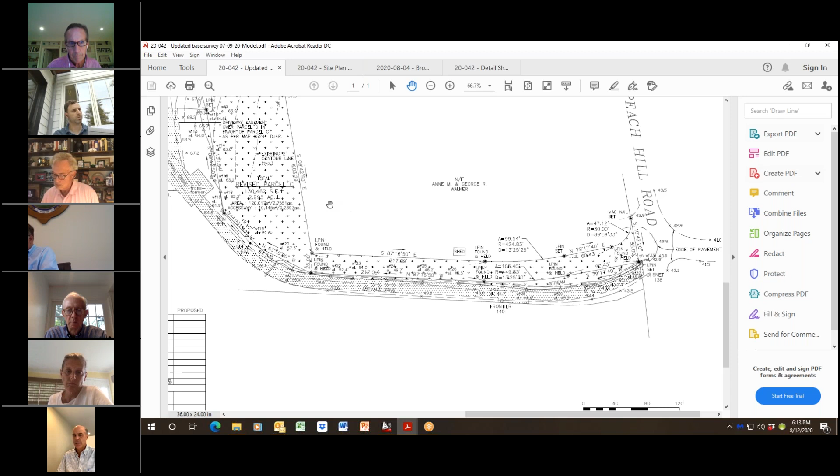Doug DiVesta, professional engineer, representing the applicant. What we have for you tonight is 26 Peach Hill Road. It's for a knockdown rebuild of a house. What we're looking at right now is a parcel that's around almost 3 acres. It's a rear lot. So I'm showing right now on the screen the subdivision survey map. Here's Peach Hill Road. There's a common driveway that I'm following with my cursor on up.

There's wetlands all along the north side of the existing driveway. It's coming up to the main body of the property. The house to the south of us was redone in 2006, so you might have seen at that point that parcel. The existing house is located in the easterly portion of the property. Property slopes from west to east, wetlands all along the easterly boundary.

What the proposal is, what we're doing is we're going to raze the existing house, construct a new house that's further to the west with an attached garage through a portico, with 2 driveways coming off of the existing driveway to service a courtyard in front of the house, another courtyard serving the garages.

With that, they're going to be putting a pool further to the west with some terraces. The existing house is currently on a septic system, which will be abandoned. A force main with a grinder pump will be connected to the sanitary sewer line, which has been brought up from Peach Hill Road.

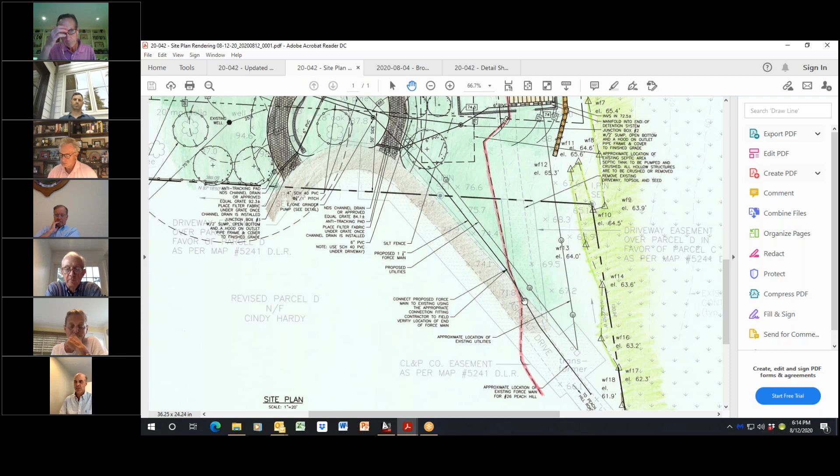The red line that you're seeing here is the upland review area. So the majority of the property is outside the upland review area.

We are putting a detention system in down underneath the proposed playing field. Right now that area is a driveway, so that will all be removed, grassed, and then a detention system will be installed there.

Erosion control will consist of silt fence, a double row silt fence with hay bales at the down gradient property line, or not property line, but just west of the

wetlands area. Also on the call today is Bruce Eckerson, the landscape architect. I'll have him go over a little more about the planting plan, the mitigation area of the wetlands in terms of removing invasive species.

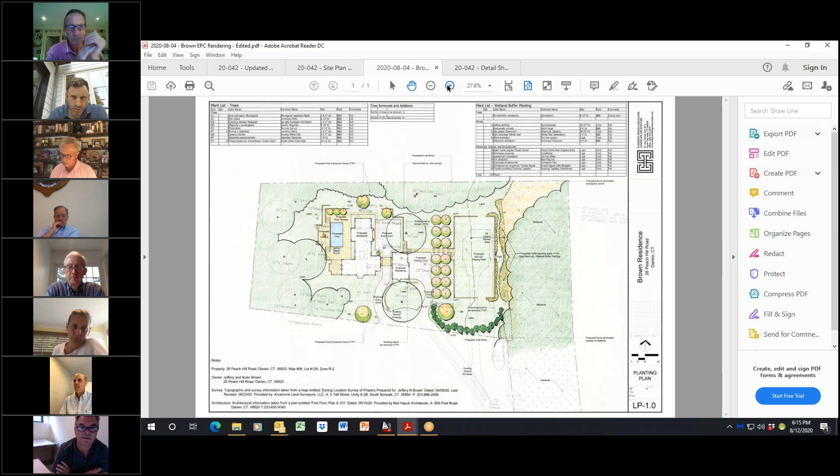So Bruce, you want to discuss your landscape plan? I'd be happy to, Doug. Thank you. Bruce Eckerson, Principal, Eckerson Design Associates, presenting tonight on behalf of the owners. We've developed a landscape plan to accompany the house and the drainage improvements.

Within the upland review area, we are going to be doing some regrading to create a level play field. On the easterly side of that play field is a retaining wall, east of the existing driveway, which will be removed, as Doug said.

Between that wall and the edge of the wetland, we are proposing to remove a line of mature burning bush and replant the area between the wetland line and the retaining wall for the playfield with a combination of native trees, shrubs, perennials, ferns, etc., to improve that edge and buffer the development uphill.

As part of the overall site development, there are several trees to be removed, all of which are outside the upland review area. I believe we are proposing 11 trees to be removed, and we are now showing 44 new trees to be planted.

We are proposing to do a little bit of evergreen screening along the southern edge of the property. Part of that screening does go into the 50-foot upland review area.

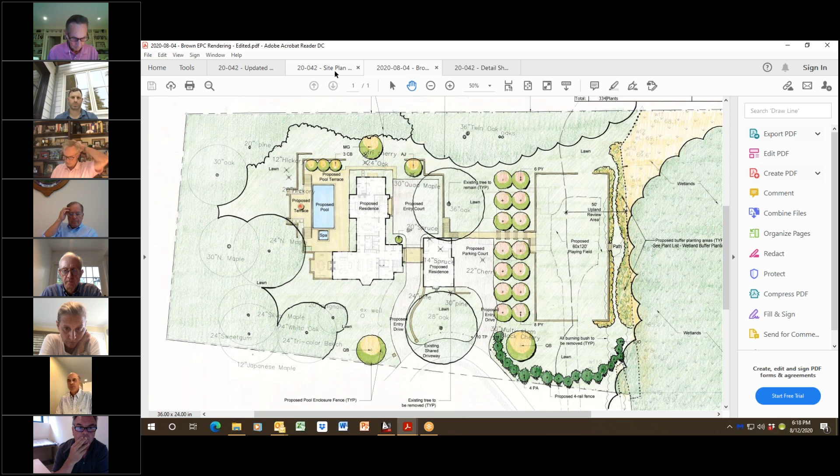Thank you, Bruce. So that's really the summary of the proposal. As we talked earlier, this will be going to planning and zoning for a grading and filling permit, so they will have a public hearing on the application. So is there any questions from the commission?

Going down my list here, Jim Millard? No, very good overview, no questions, Eric. Thank you.

Gunnar? One question, on the diagram, what is just to the west of the playing field? It looks like little circles. Yeah, right, these are additional trees, decorative trees. Bruce, what type of trees are those? That's intended to be a grove of cherry trees, ornamental cherry trees on the slope. Okay, that was my only question. I just think that looks good.

Okay, Michael Irvin? Can you hear me, guys? We can. Oh, great, okay. Hey, Doug, couple questions. Sure.

So to the east of the demarcated wetland boundary, the upland review area boundary, where you show the storm, are those galleys, proposed galleys? Yes, they are, they're Cultec units, they're called C4s.

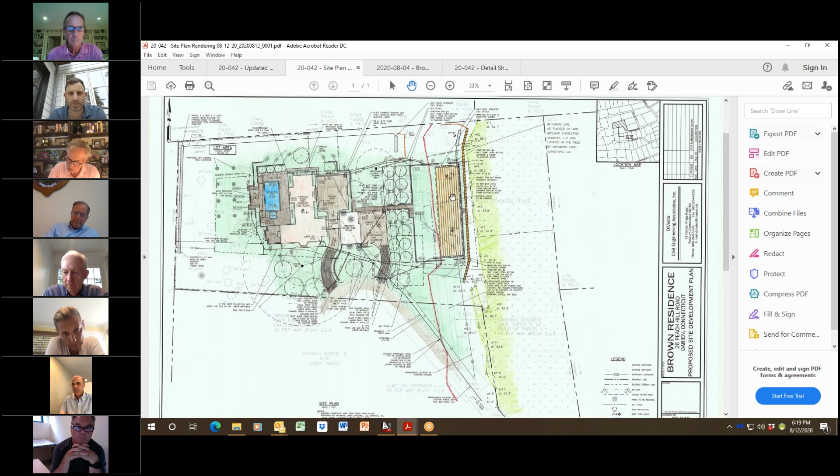I'm sorry, is that area actual wetland? No, it's not. The wetlands are this, let me blow this up a little bit for you. The wetlands line is right here where this green line is, with those triangles. That's the wetlands boundary from there to the east, to the easterly property line.

And you have tests, so I can see that you have 2 perk test holes, 2 deep test holes and 2 perk tests on each end of the drainage system. And how did those work? Let me show you, what do we got here?

The question is you're putting stormwater retention adjacent to a wetland. Are those going to perform? I mean, obviously, yes they are. You say they're going to perform. We got 11, the water's a little slower, one hole's a little slower there.

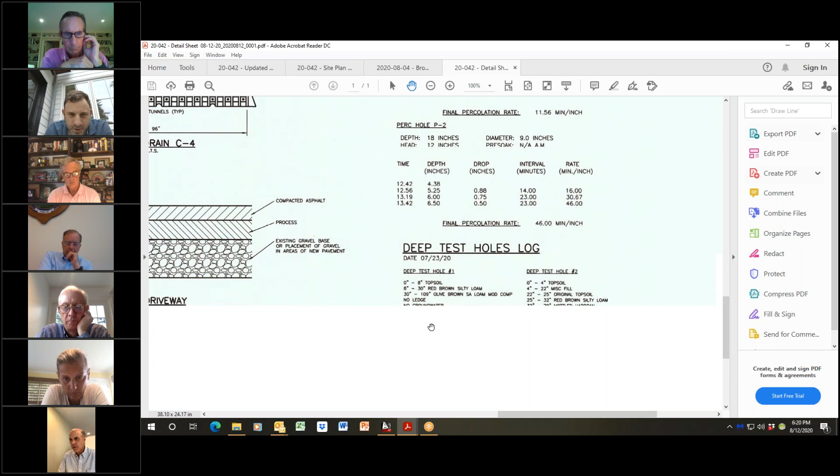Groundwater level mottling at 36, mottling at 33. Groundwater is at 65, and the drainage system is fairly shallow. I put the drainage system fairly shallow there. That's why I used a smaller height drainage system.

So we actually raised this up a little bit. We were actually a little lower, raised the whole area up, because this lower portion here is going to be filled up. So we're raising the system up, so we are above the groundwater level. As it is, groundwater is 65 inches below grade, but you're going to fill on top of that to install the Cultec, to give the Cultecs increased area to infiltrate.

And those Cultecs, what are they, like 24 inches deep? No, only 8 inches deep. Oh, they're only 8 inches deep. That's why we're using them.

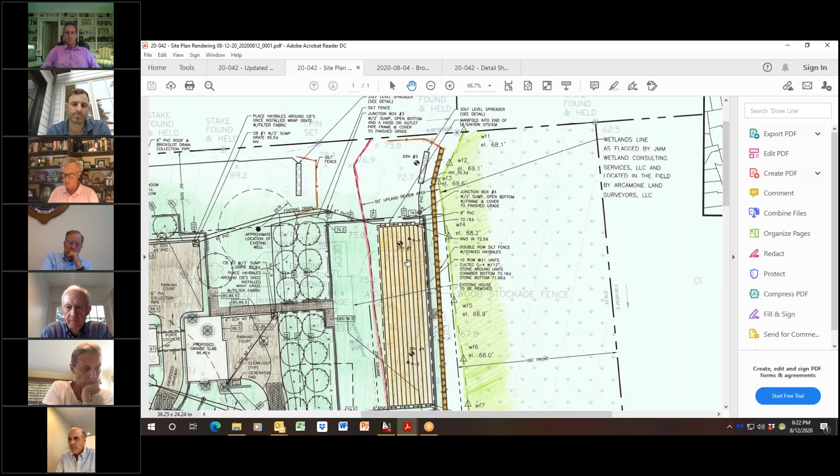And how much are you, what's the total amount, because you're going to planning and zoning for filling and grading, how much total cubic yardage are you increasing or filling? How much are you filling? We're filling it approximately, this corner here is at 74. Existing grade is around, I think it's around 70.

I can see the numbers here. It's like around 3 feet of fill brought in that area. And what would the total yardage be, cubic yardage be? I don't know off the top of my head, I'd have to do the calculations for you. How about ballpark, dump trucks? Again, I have to do some numbers to tell you for sure.

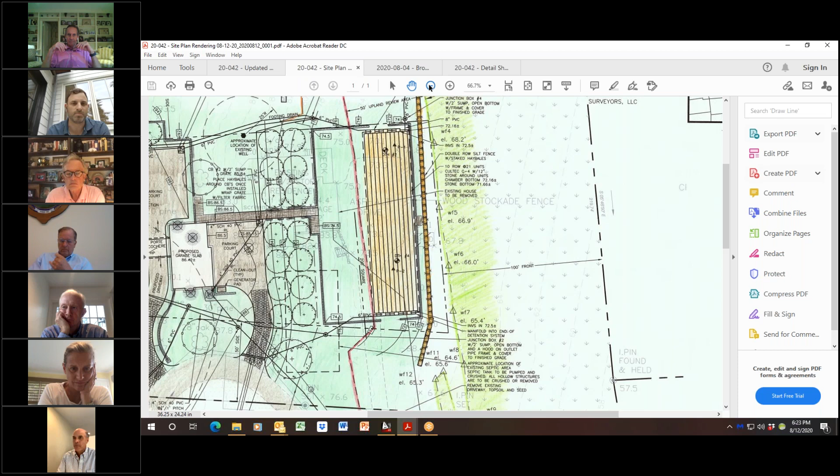So to quote my chairman, I hate to be the mosquito that always makes the first bite here. I guess my question is, as a commission and wetlands, I find a trend where we have these large developments. Our mission is to protect the impact to the wetlands. And all of the mechanical drainage operations are finding themselves in the upland review area. Is there a more prudent and feasible location and place to put this stuff? Or is everybody comfortable with this method? That's my only comment.

Well, the drainage, this whole property drains from west to east. So it all drains in one direction. So we're not changing the flow of water, it's still flowing in the same direction there. Is there a place to put the drainage system in another location? There might be, but everything is draining in one direction. So we collected all the water and brought it to one area, and then we're allowing it to go through into a wetlands area from there.

We felt this was the most feasible area, because this site is also not served by town water, it's served by private or individual wells. So we have a well on this side and a well on this side here. We've got to maintain a certain distance from that for the health code. So there's limited areas where we can put a drainage system out here. We felt that by taking away an impervious area of the driveway, and making that a lawn area, play area, and putting drainage underneath, that was the ideal spot, because it's a fairly level area being created, and that was probably the best use of that land for us.

No, I understand that. I have no other questions. Okay, Kelly? No questions. All right, I have no questions as well.

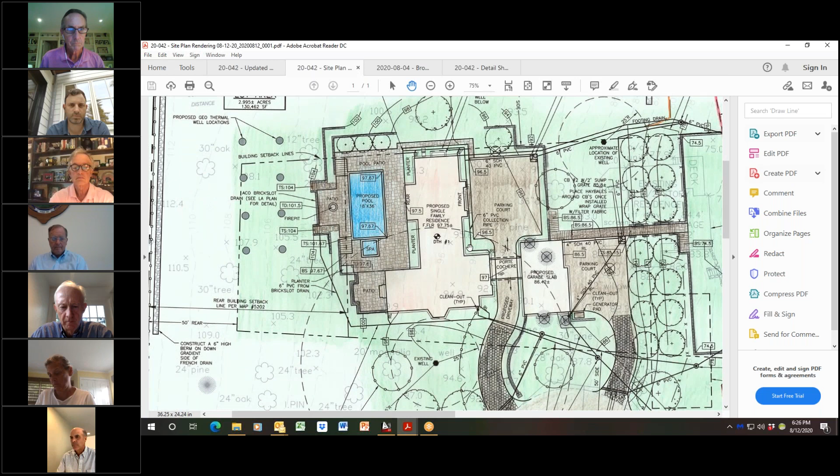Bruce, do you know how much raising the house up out of the ground there? Bruce? Yeah, sorry, can you zoom in just a little bit? So, 97, 93, so 95, 6. So we're basically through the middle of the house, Doug. You see the 96 contour at deep test hole 1. Yep, so the finished floor of the house is 97.75. So it's kind of a balanced cut and fill. So if you go down 9 feet, basically the basement's going to be at the garage slab at 86.42. Right.

So we'll be in the groundwater, Eric, but we're also putting a curtain drain up along the westerly property line that will collect discharge from the neighboring property that drains onto this property. So we're intersecting some of the groundwater up here, bringing it down to a level spread and allowing that to sheet flow down along the westerly, northerly property line there.

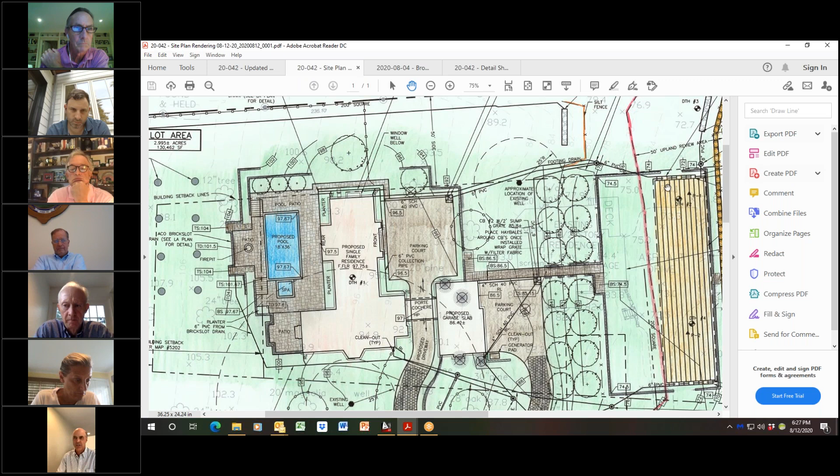The footing drains will again have a sump pump. For emergencies, they'll have a sump pump, but it's not going to be going 24/7. This one won't have a sump pump. It'll be gravity fed because of the elevation difference in the property, draining down into our detention system area here. So we've got that being collected there. Correct.

Okay, Rich, what should we do? Because I don't think we need a public hearing on this. My feeling was that currently it's all lawn right to the edge of the wetland, or actually it's euonymus and invasives. So the net, I think, will be a positive to have some of that upland restored. From an EPC perspective, what could be done?

I can write an approval for your review at the next meeting. Okay, well, Rich will write up something and we'll review the draft next meeting. Thank you.

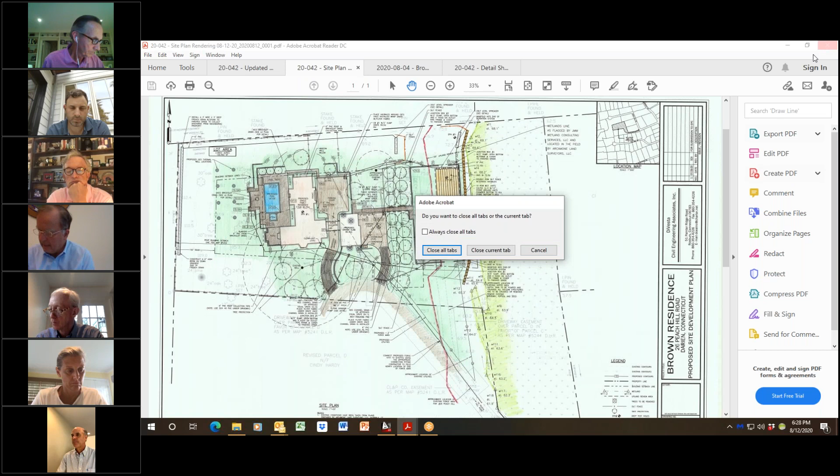Okay, next item of business is EPC 19-2020, Rajat Gupta, 2572 Boston Post Road, proposing pool and patio construction in an upland review area. The site is shown on assessor's map number 54 as lot number 4.

Okay, Doug DiVesta, professional engineer, representing the applicant. Just give me a minute and I'll get those drawings up on the board here for you.

Let's see, start off with the

Mr. Chairman, I'll just jump in real quick. As I've been absent from the prior 2 meetings, I just want to let you know that I did review both of those meetings and the materials. Appreciate it. Thank you. Thank you, Michael.

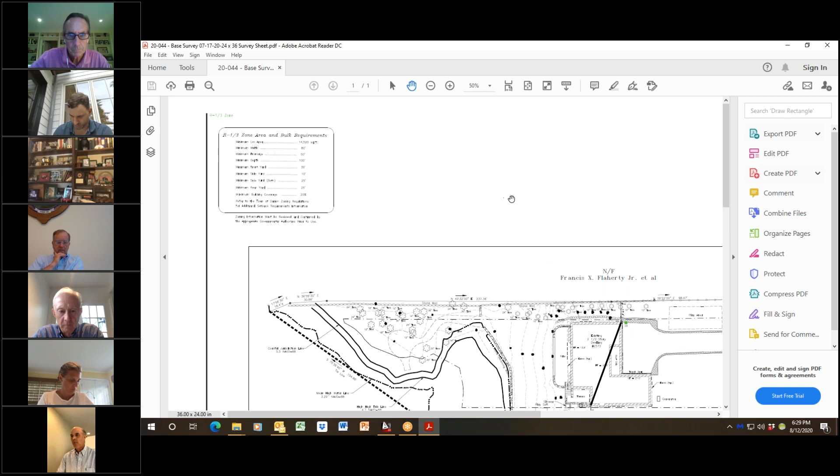Okay, so the parcel we're looking at right now is at 2572 Boston Post Road. It's in the 1/3-acre zone. This house was constructed, as you see on the survey, in 2006. Driveway coming in off of Boston Post Road to the existing house. There's existing drainage on the driveway and the rear part of the property there.

But the proposal is to construct a pool at the rear portion of the house. I'll pull up my plan. Oh, no, how come that came up? Okay, there we go. Right job now, right project.

So what we've got here, we have Holly Pond to the south of us, colored in blue here. We're looking at putting a pool right off the back rear terrace, going somewhat into the rear terrace area. There's a drainage system that was installed in 2006 for the front portion of the driveway, and there was one installed approximately where the proposed pool is going to go, so that's going to have to get relocated a little further to the north or west. Then a new drainage system for the new impervious areas will also be installed to handle the water quality, because we're in the lower reaches of the watershed along Holly Pond, looking at water quality versus water quantity. So we're proposing a detention system for the water quality from the impervious area.

So again, we're looking at a new pool area here. There's a retaining wall that basically holds back the lawn area. This area in here is all kind of a marshy area. The property does continue on up a little higher to an area where there are some mature trees and a little pathway that goes out that they can access Holly Pond from. So that's really what we're looking at doing for this project here.

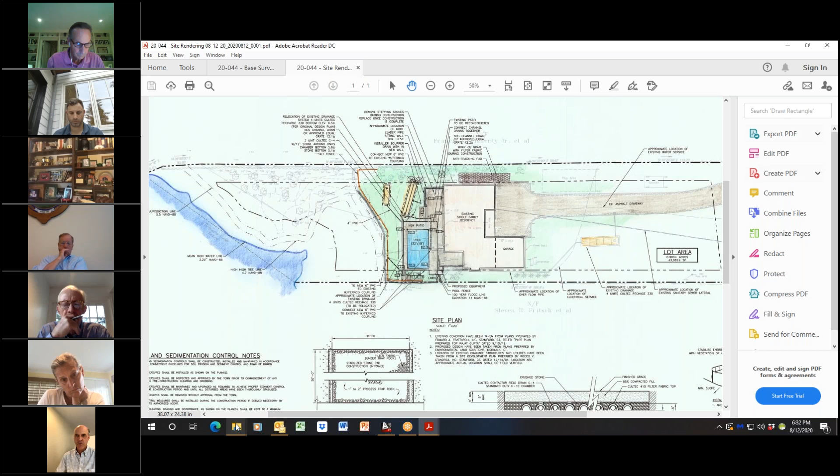Matt Pop is also on here. He, landscape architect, doing the layout. So this was the alternative that we finally came up with. Let me go over and show you one of the alternatives that we looked at.

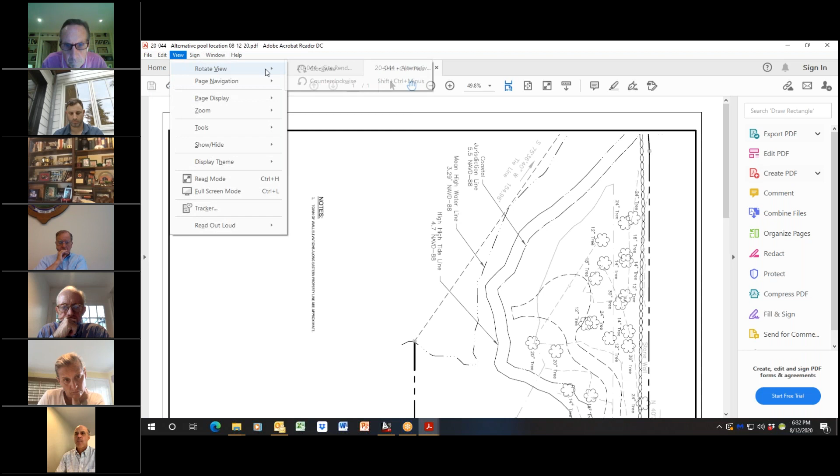We actually looked at the proposal that the client would really like to have, which would be a pool perpendicular to the house itself, to give a little more playing area for his kids. But again, we felt this was getting too close to the existing retaining wall, with a lot more disturbance closer to the Holly Pond. Therefore, we went back and looked at utilizing a pool parallel to the existing house.

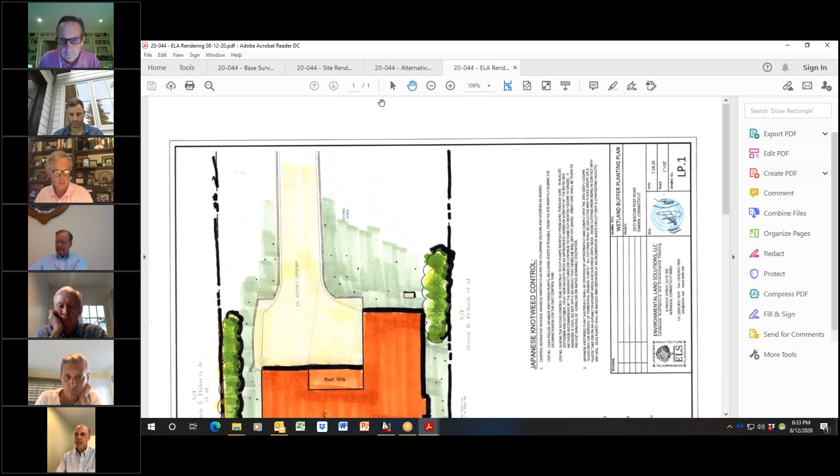Removing a portion and going into some of the existing terrace area. I'd like to have Matt discuss a little more about the plan, the grading, and the mitigation plans he's planning to do out there.

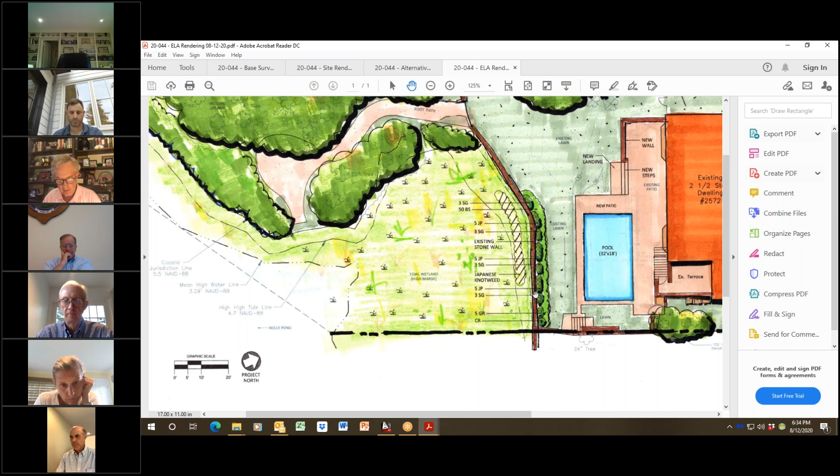I guess he can't. So, basically what we're doing, he's doing some mitigation. I can't tell you the plant species and stuff like that, but he's proposing right along the retaining wall to do some additional plantings on the north side of the existing retaining wall, just to enhance that area a little bit more. That's really the only landscaping portion he's doing. I think we're going to add a few more trees, and we're taking away some of the trees. We're adding a few more trees up along the north side, west side of the property there.

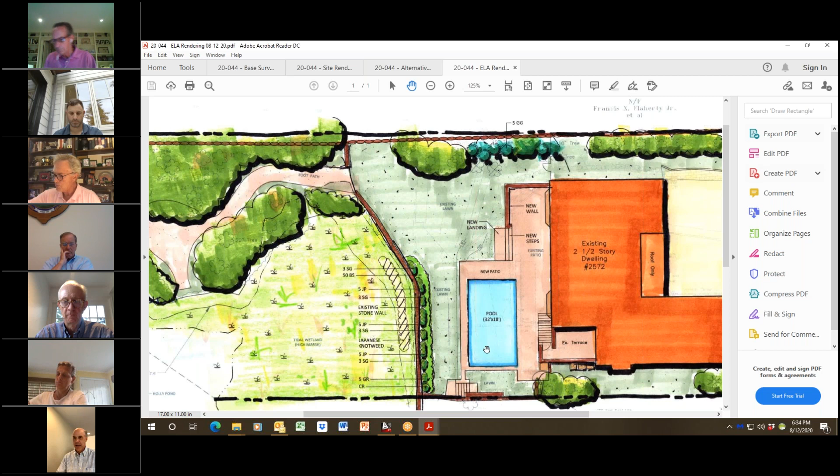Pool equipment will be placed next to the existing retaining wall alongside the house here. This will also be submitted to planning and zoning for CAM, because we're in the coastal area with Holly Pond, for grading and filling, and flood damage prevention. So this will be going to a public hearing as well before planning and zoning, because the flood zone is coming right up through the back portion of the existing house, where my cursor is here. Again, this will be going before planning and zoning as well. If there's any questions, I'd be glad to answer them.

Okay, Gunnar? Yes, so that retaining wall on the southern part of the house, below where the proposed pool would be, that retaining wall... Was that part of it when the house was constructed? Was that put in at that point? I guess my question, Doug, is how did that get there in the first place? I mean, is that legal there? Isn't that in the upland review area? Let me see if I have another map of the property itself, an older map.

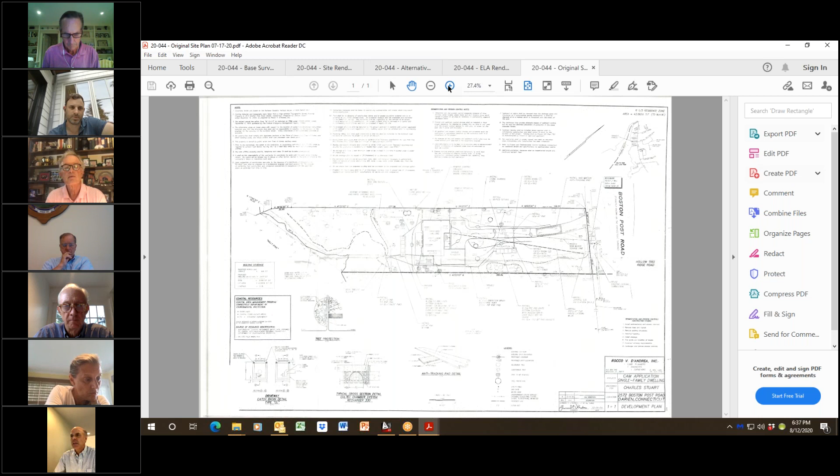And to Gunnar's point, is there any existing drainage going through that wall? Well, there was, based on the original design—here it is. Original design was done by Rocco D'Andrea. Let's see what they have on this plan. This is the plan done in 2006—uh, 2004, constructed in 2006. It looks like there was an existing wall that they extended and raised to elevation 9.5. So it looks like it was an existing wall there. And the drainage system, as we talked about earlier, was in the front, and then there's a piece in the back that was going through the wall back in 2004 when it was originally proposed. So the existing wall may have been done prior to 2004, when the house was raised in 2004, and then the drainage was installed and went through the retaining wall there. So I think that answers your question.

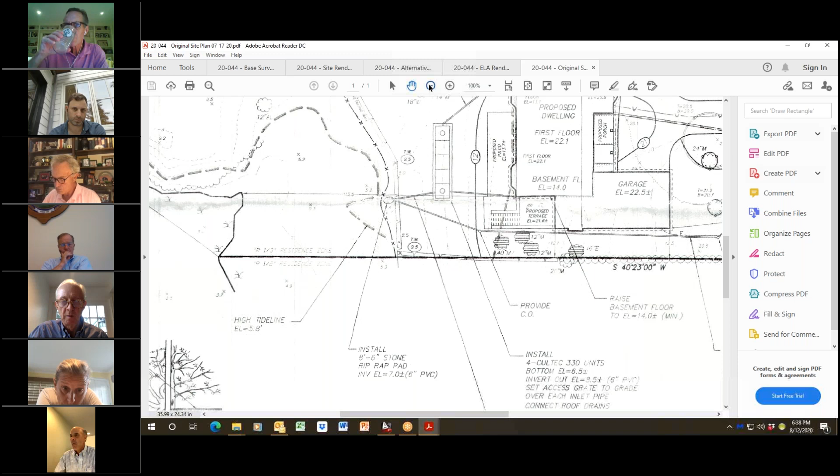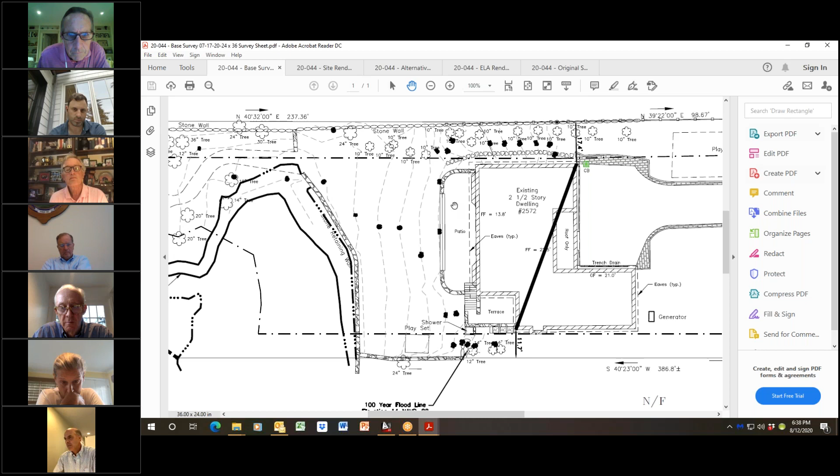Okay, so the other question is, you mentioned the flood zone goes right up to the back of the house, is that right? Let's see, this is—yeah, it's elevation 14. So elevation 14 is right through here. It looks like it goes around the house here. Again, this had to go before planning and zoning back in 2004 when it was approved, just for the fact that it's in the CAM and flood damage prevention area.

So what are the chances, if we have another one of these big storms like we get from time to time, combined with a high tide, of the pond overflowing and flooding that whole thing out all the way up to the edge of the house? I know it's not something that happens every year, but when we get one of these big storms, what's going to be the impact? Well, it's a pool, so it's not habitable space, it can flood. The water will just fill up—it has a little storage in there—and it's not going to cause any harm to the family, because again, it's not habitable space.

Hey, this is Rajat Gupta, can I say something? I'm the owner of the house. Okay, Raj, go ahead. Yeah, as per previous owners, they were here during Sandy, and they said not even a drop of water touched our patio during Sandy. Just to give you a little background.

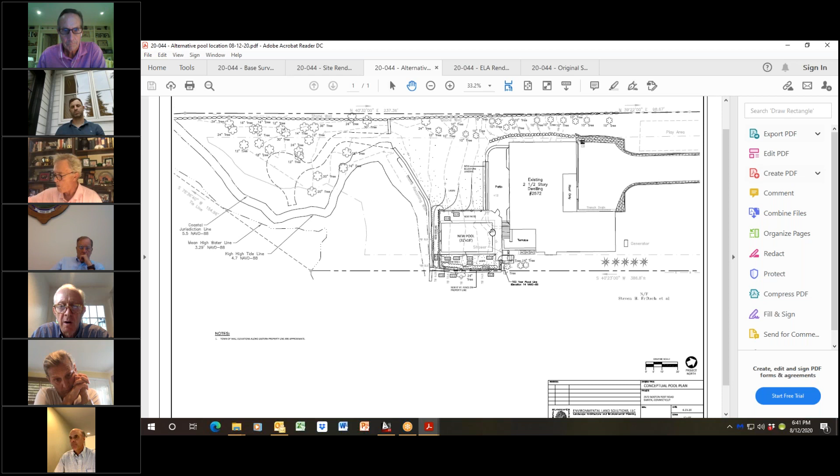And I was there this afternoon looking at it. It doesn't look like there's a whole lot of excess space there at all. I'm wondering how you're going to get your equipment down there on the west side of the house, but you say there's enough room to get equipment in there.

Right. I believe Raj has talked to a few pool people, and they assure him they can get down in there, again removing a couple of the trees we indicate on the plan, to get the machines out and around the existing patio area and into the rear portion of the property.

Okay, all right, thank you. You're welcome.

Michael Irvin? No questions, no questions. Kelly?

I was just curious about the type of pool. I'm assuming it's going to be saltwater. I believe that is correct. It's saltwater.

Okay, saltwater then. And I assume, Eric and Rich, that we put contingencies on - I'm assuming it's also a gunite pool of some kind - about removal of water and how that's handled, given that it's on Holly Pond and there are chemicals even in a saltwater pool.

Typically, when someone drains a pool, recommendations from DEP are generally that it be allowed to go across a lawn area. If there were chlorine, for instance, it would dissipate. There's much more of a concern with freshwater systems during trout breeding, which this isn't. So usually when they drain a pool, there's not much of a concern.

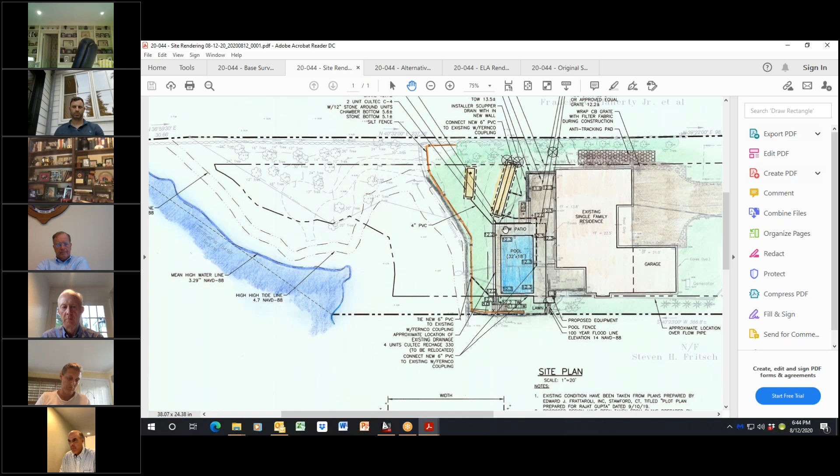No, I think what Rich was saying is that they pump it out onto the lawn area, not into a detention system. Okay, well what are those pipes that are there now on your plan that actually go through the retaining wall right now? That's collecting the runoff. That's collecting runoff from the driveway.

Okay. It's based on the driveway, and for the front part and the rear portion it goes under a drainage system located in the back, right where my cursor is now, which will be relocated to this portion here. Those two pipes come along the east side of the property and also come down, tied together, and then go to the retaining wall. So those are the overflow systems after overflow from the house roof areas and the driveway area.

Okay, all right, that's all I had. Thanks. Okay.

Rich, this is going to go in front of P&Z. Correct. Will that be a public hearing then? Yes. Okay, so that is a public hearing. I don't get the sense of the commission that we need a public hearing. So I guess what we'll do is you'll write a draft for us to approve. Yep. Okay, and then we'll do that next time.

Okay, next item is EPC 2020, Megan Thornton and Eric Roemer, 49 Birch Road, proposing pool and patio construction in an upland review area. The site is shown on assessor's map number 11 as lot number 11.

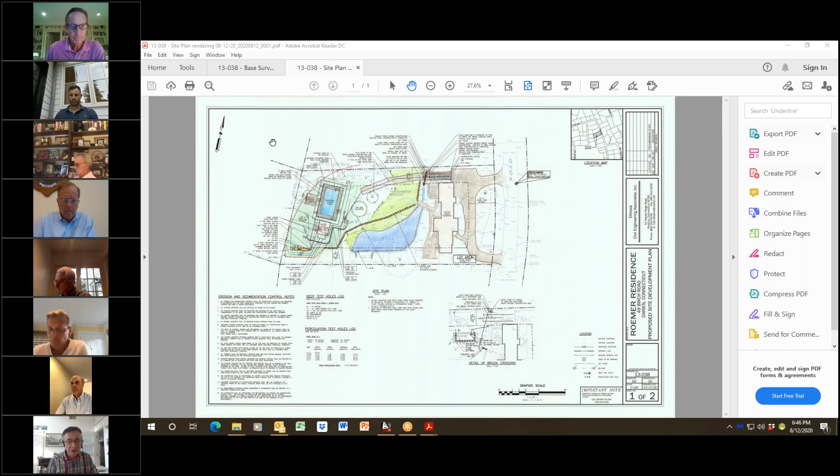Let me just take you through the general idea, and then Doc can get into a little bit more nitty-gritty. I'm sure you've been to the site. It's a lovely site, but the problem with it is there's actually a pond and a brook that comes right through it. When you look at the house and where the brook and pond are located, that makes it very tight to have any kind of outdoor space.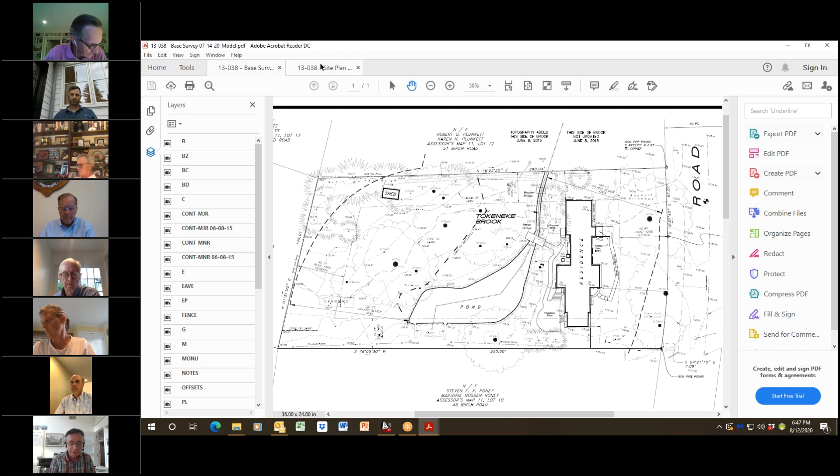It really divides the lot. The lot actually slopes quite a bit up into the upper corner as you look at the plan. So what we were asked to do is find a location for a swimming pool with a small pool house, and do some mitigation that will go with that.

There's also a little bit of an issue with a patio and a fireplace that was constructed without a permit. The owner tells me a contractor said everything's good, we don't need a permit for landscaping, so they went ahead and did that. Unfortunately, we'll have to deal with this now.

So the idea here is this: that fireplace that's there is too close to the house, does not meet code, and was not really inspected properly. So what we're proposing to do is take that down and remove it totally. But we would like to keep the patio that's there, which was also built without a permit, if possible.

Also as part of this application, we're proposing to move a playscape, which you see there, exactly there. It's located within the setback line. Playscapes that have structures, something that's elevated with a little slide on it, should obey the setback line, so we're going to move that behind the side yard.

Then also, as we move to the left, there's a shed placed there by the previous owner. We don't know exactly the history behind it. It's kind of ugly, and it's also within the setback, so we'd like to remove it. So those are the three things we're going to do: take out the fireplace, move the playscape, and totally remove the shed.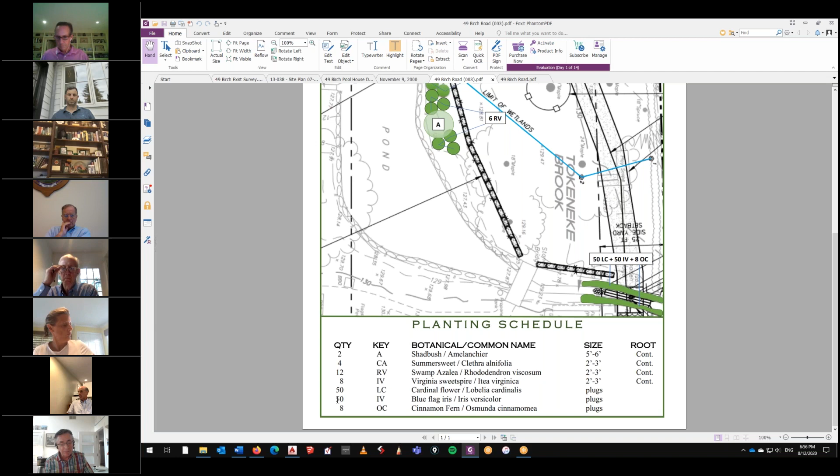Eric, can you come back to me? I'm formulating a question. Jim, I think we want to go to public hearing on this, so if you have a question, great, but otherwise you'll get a second opportunity. When's our next meeting, Rich? September 2. So don't worry, you'll get your chance. Will there be a peer review on this application? Gunnar?

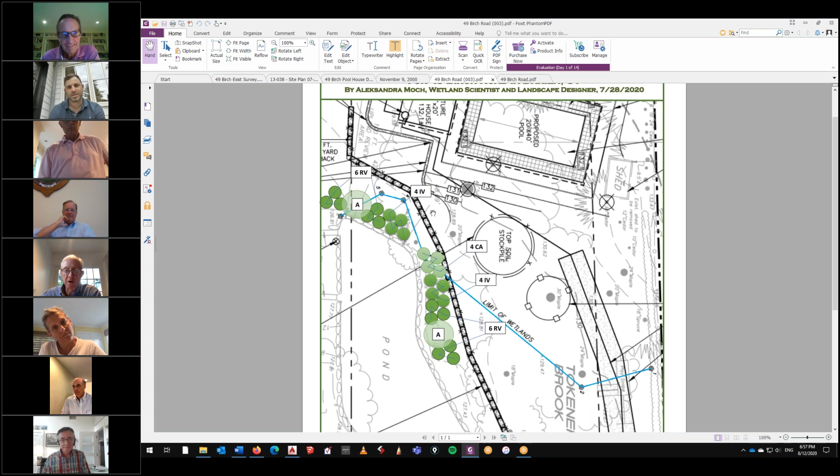You're putting a lot of faith in Jim's memory to wait for that public hearing, but I'm sure he's up to it. So I was over there this afternoon, and as you walk across that little wooden footbridge, there was what looked like a little water course coming down into the pond. It looked like right underneath that wooden bridge, but I didn't see any water in there, which was kind of surprising, almost really no water. My question is, does that little stream normally flood, or if we get a lot of rain or one of these storms, does it?

If the water comes through, it does fill up here during heavy rain, but it goes through very fast. What I was told is that the pond acts as a buffer here - it fills up, water comes up a little bit, but it never really floods out onto the patio or next to the house. The house never flooded. You can see how narrow this is, so because of that narrow profile, the water gushes through very fast, and then it ends up in this kind of pond buffer. There is water there now, but the brook does dry out - it's not a year-round brook that has water all the time.

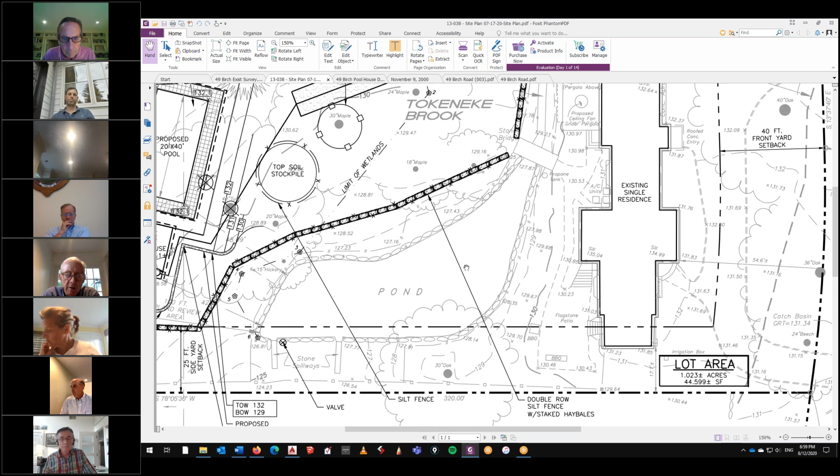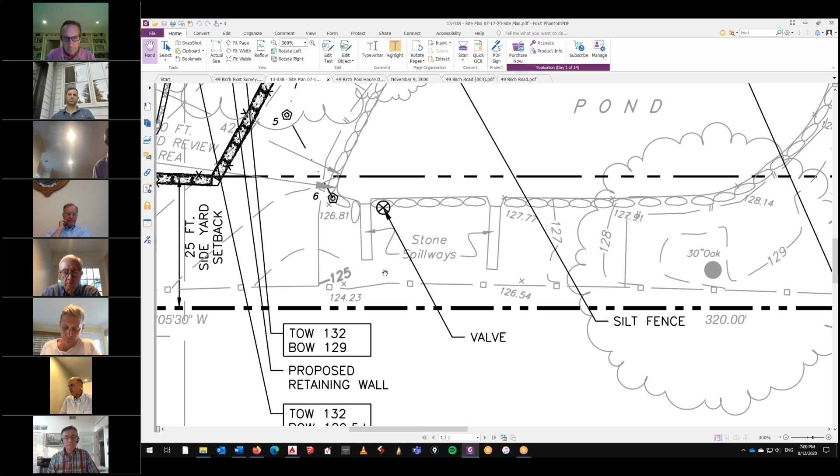So I guess it would be on the southern end of that pond. I couldn't get over there to really look, but is there a drainage, or where does the water go from the pond? Doug, you want to say something? Yeah, there's two spillways - on the south side there and the other side there. They come together, and you can't see it because there's a fence on the southern property line, but peeking over that fence, it just goes into another brook. It continues on down south, paralleling Birch Road basically all the way down towards the Post Road there. It meanders through and continues on to another stream.

It's funny, I've never noticed that stream - does it go all the way down to where that 7-Eleven project is on the Post Road? No, I think this may feed into Cherry Park, and then eventually into Tokeneke Brook and then into Scotts Cove. If you know the marsh to the east of Tokeneke School - it feeds that, and you can track it north of there. So that's the Tokeneke Brook.

So I guess the other thing - that pool house and the stone patio by the pool, between the pool and all that stuff, how much impervious area are you guys creating? I guess I could add up the numbers, but just bear with me for a second here.

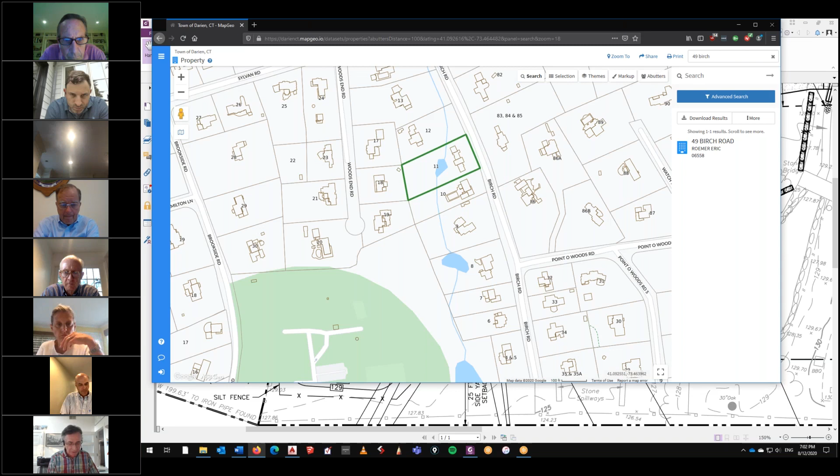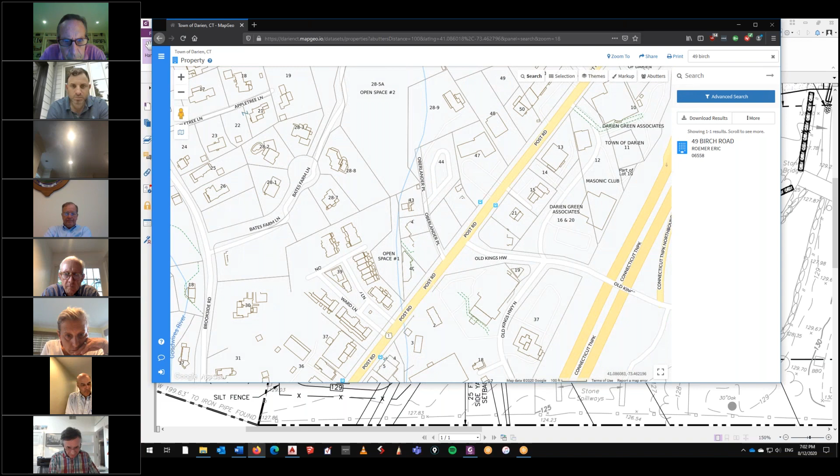Well, Doug is looking for it. Here is that brook, just to show you how it actually feeds. The water goes down through another lake or pond - the cherry pond - and it keeps going, under 95, keeps going. I think I just made a U-turn. Where's it go? Oh okay, yeah it does - it goes up and around, and just keeps going, keeps going, finally to Long Island Sound.

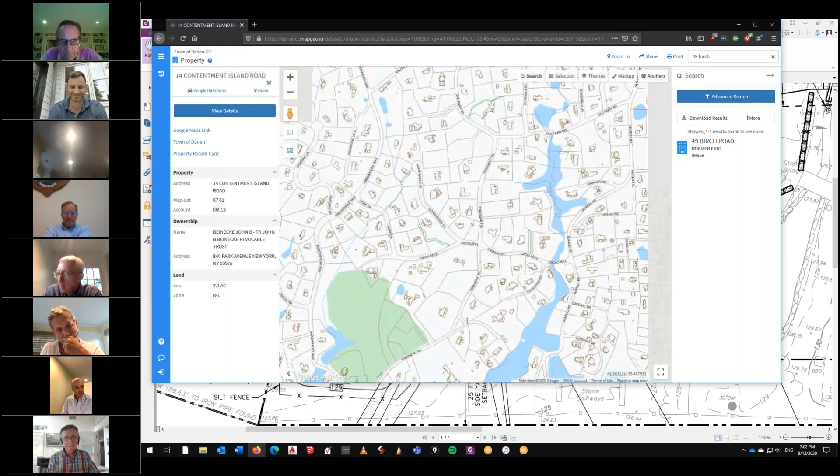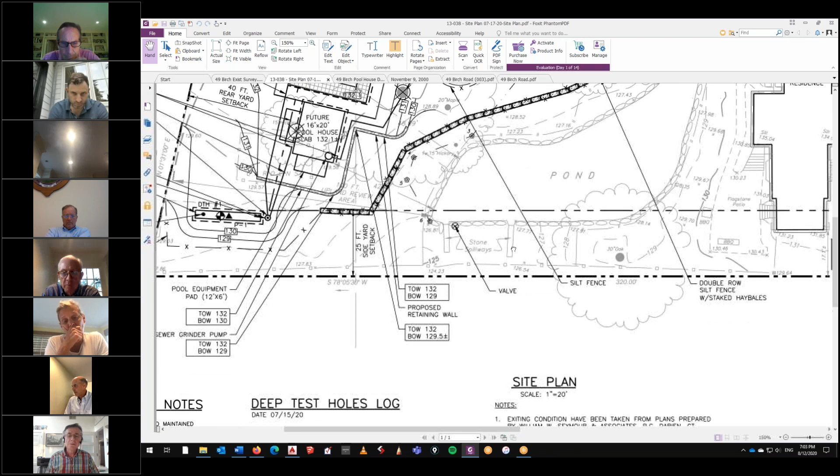How about the future pool house, the 16 by 20 little pool house - is that going to be within the setback? That's behind the setback line, it's not on the - is that encroaching on the wetlands? No, it's in the upland review area, the wetlands are down here. Right, I saw the pink flags in the ground, but it's kind of hard to tell exactly what the limits of them were.

Well, it's like this - from the edge of the pond to the corner of the proposed pool, we have 48 feet. Here we have, from the edge of the pond to the corner of the pool house, 42 feet. The limits of wetlands is here.

And so it's not within wetlands, it's within the upland review area, by about 2 feet here and about 8 feet on this corner. I'm sure, as Eric said, it'll get going over in the P&Z public hearing, so I don't have any other questions.

Well, I think we're going to have a public hearing on this. I'll propose that after everybody finishes their initial comments, we have a public hearing for EPC, and then we'll go from there. If there's a P&Z meeting, for grading and filling, no? No, that's why we will have one.

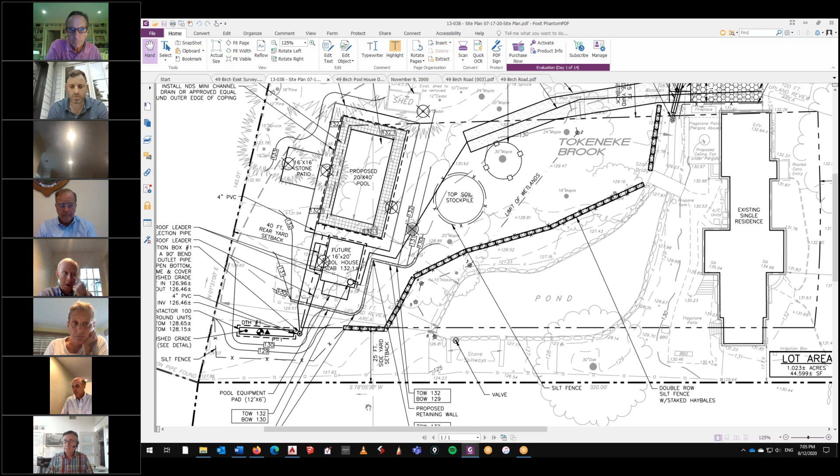That was Gunnar. Michael Urban, my only question is, will this be a peer review application? It could be. I didn't consider it in terms of drainage - normally I would have Darren review it. But my initial thought is there are quite a few moving parts here that I think it would be beneficial for a peer review.

Is that okay, Rich? Yeah, it might delay the hearing. That's okay. Yeah, because it is the 12th, it might be hard to. Okay, Michael, we'll suggest a peer review on that one.

Do you have anything else? Michael, do you have anything else? Sorry, I didn't hear that. No, I don't. Thank you. Okay, Kelly?

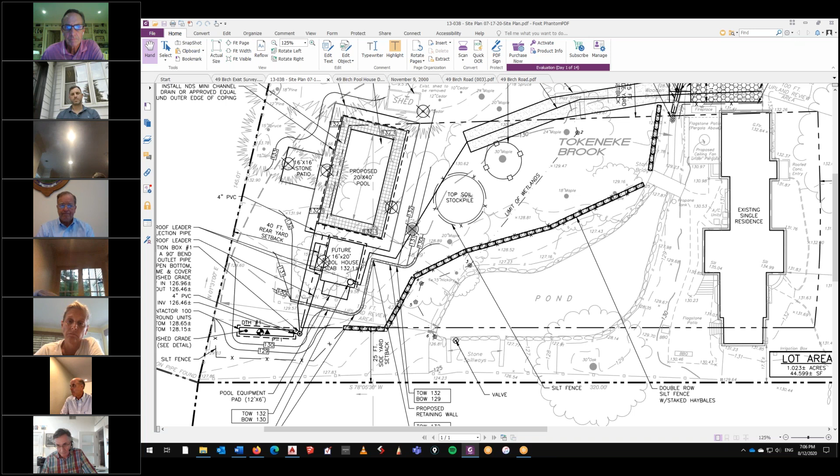I had a question on the terrace and the fireplace that was built without a permit - is that in the wetland? Oh, it's in the upland review area. We did issue a notice that it's in violation. Normally we give people some time to figure out whether they want to ask to keep it. Honestly, I could have treated this possibly as an agent approval.

But what triggered the town going out there was the fireplace. Actually, it does not meet building code and it cannot meet zoning, so the fireplace definitely has to go. It's just whether you want to permit the terrace after the fact as part of this application. So the short answer is they could have come to you with an application for just the terrace - I guess that's something we'll have to debate in the public hearing.

Rich, for the building code piece, how does it not conform to building code? Oh, it's not tall enough - it's too close to the building and not tall enough to be away from the roof. That's my understanding. Mike Beatty from the building department was out there and he made that determination. But it's kind of a moot point because it doesn't meet zoning code.

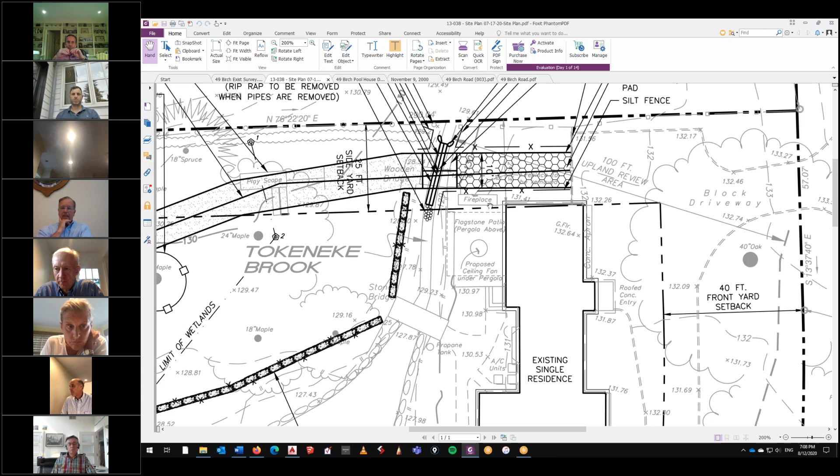So the owner has agreed to actually remove it. Yes, and replace it with a terrace. No, it would just be removed - just remove, period, and be grass or something. Be right back to lawn, yes. Okay, Kelly, does that answer your question? Thank you.

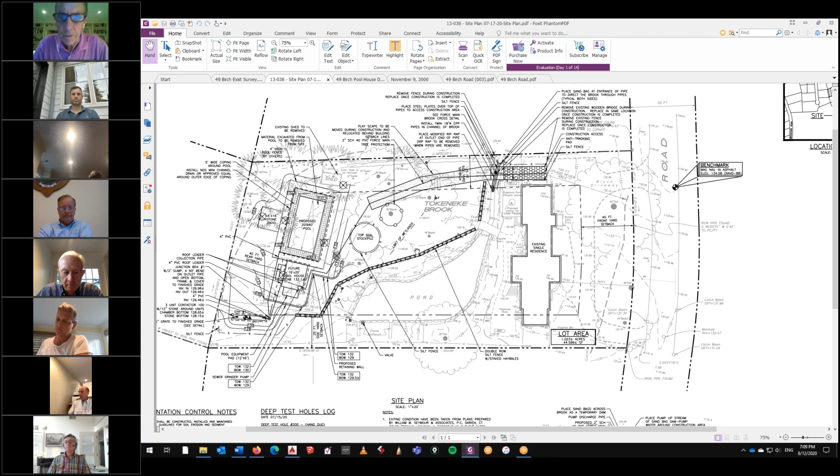Bill, right? I have no questions, thanks. I think there's a consensus we should go to public hearing on this. Jim Millard, I would appreciate if you could move that we send this to public hearings. I'd be happy to do that, Eric. I propose to move EPC 20.

The application of EPC 20, 2020 to an EPC public hearing to be held when Rich schedules it. Gunnar, is that a second? Yes, I'll second that. Without objection, I'll call for a public hearing then. Rich, it's up to you to schedule. Yes, well, it'll be September 2nd.

I'm looking for a peer review, it's going to take a little time. I'm away next week, I'll mention it to Jeremy - he can maybe get in touch with somebody to push it along. It might not be fair to have comments before the 2nd. So what you could do is open the hearing if you don't have comments, and continue it, but I will schedule the hearing. But you're here for the hearing. Yes, the normal regular meeting. Yes.

Okay. That's it for this one.

Thank you. Let's move to the public hearing. EPC 05-2020, Joe Pagarillo, 49 Sunswick Road, proposing a 2-lot subdivision and related house construction, septic field construction, and filling and grading within an upland review area. The site is shown on assessor's map number 62 as lot number 25 and 28. This public hearing is continued from July 1.

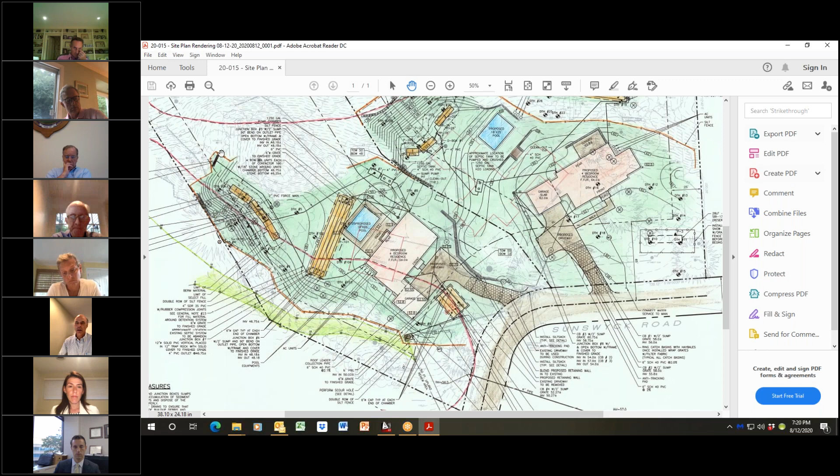We also revised the detail for the level spreaders and added a note on the detail to add soil on each end of the level spreader, so if the lip of the level spreader gets out of whack, flow won't go around the outside of it. We also added an operations and maintenance plan indicating that the level spreaders on Lot 1 and Lot 2 need to be inspected twice a year to make sure the lip on the level spreaders stays level, so we don't get any concentrated flow. That was one of the comments we had from the review. I believe that is it—let me just double check my notes here.

Yes, Jackie, that's all the changes that were made and that were submitted to the town for public record. Okay, great, thank you. And I know that Mr. Canis is on with us too.

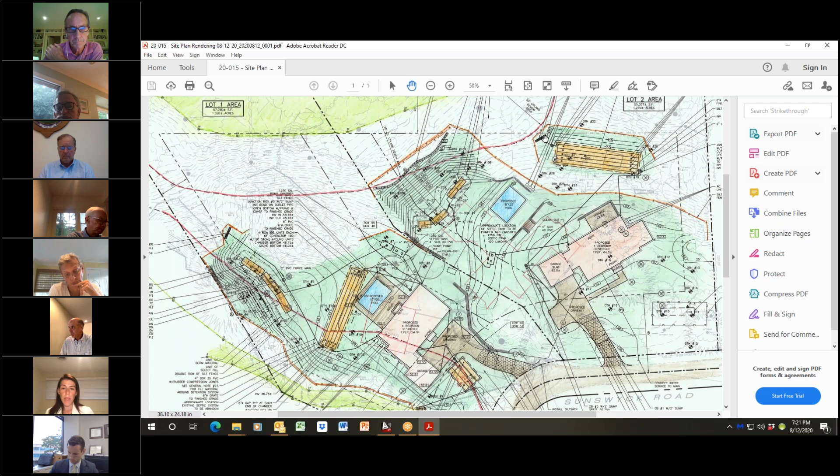We think we've had meaningful conversations with him. We've satisfied all of his comments, and in fact, there's one more recommendation he had made about ways to manage the fill with a particular retaining wall or some other means that may be preferable. So we've thought through those. We'll speak to that in a minute, and we can propose a condition that may be satisfactory. But really, to summarize all of this, what it really shows you is that we are representing a very sensitive and complete application.

I know this application was originally filed in the late winter and has been through a few rounds of review with Mr. Canis, with staff, and with your commission. And we think we've responded to all of those. In reviewing this application, as with any other, this commission is required to consider a specific number of factors. There are 6 factors set forth in Connecticut General Statutes 22a-41 and reiterated in section 10.2, criteria for design of your regulations, on which you base your decisions. If you'd indulge me, I'd like to go through those with you, because I don't know that those have been articulated yet for this record.

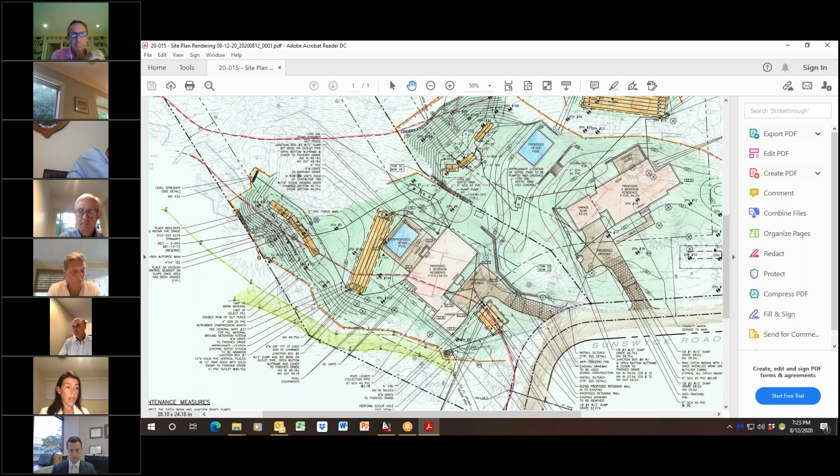Letter A, the environmental impact of the proposed regulated activity on wetlands and watercourses. This proposal has been designed to mitigate any potential impacts altogether. Both lots have included a comprehensive stormwater management system comprised of various BMPs, including: 1, collection and treatment of runoff at the source; 2, deep sumps in the stormwater collection structures; 3, scour holes; 4, subsurface detention systems; 5, hoods on outlet pipes from the stormwater collection structures to retain floatables; and 6, utilizing the level spreader that Doug just referenced.

The applicant has also provided a maintenance plan for all these systems on both lots to make sure they function appropriately and remain manageable well into the future. As Mr. Canis concludes in his July 30th memo, the proposed septic systems meet the requirements of the health code, and, quoting his letter, are sufficient to demonstrate that there would be no unreasonable harm or pollution of the wetlands. The Darien Health Department has agreed with its referral. In that same letter report, Tighe Bond also notes that the post-development runoff volumes will be less than the pre-development runoff volumes, meaning the applicant is introducing improvement to water conditions.

The stormwater drainage system is designed to address water quality and peak flows from the site, as well as volume of runoff. The proposed devices are sized to capture and infiltrate the water quality volume, then meter out the remaining stormwater, all to ensure that post-development peak flows are less than or equal to pre-development volumes. In addition, the mitigation planting plan calls for replanting all the disturbed buffer areas. The replanted vegetated buffer area includes dozens of native species and will continue to function as a filter strip, which is important because that further protects the wetlands and upland review area.

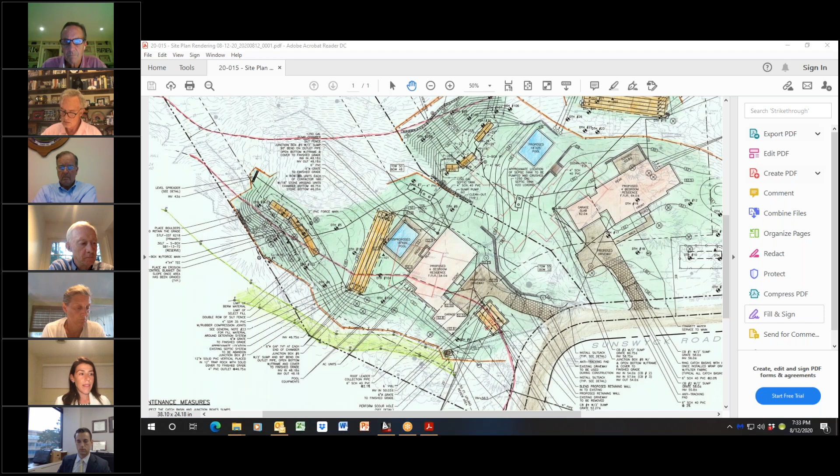So we think that we have provided you that substantial evidence to show that the standards of the general statutes and 10.2 are satisfied. Our engineer, our wetland scientist, our soil scientist have all endorsed this, and your engineer has also endorsed this proposal.

Jason, would you mind referencing the condition? There's some additional work that we can do in response to Mr. Trinkus's last comment in his recent letter. In speaking with our team today, we would like to offer a condition for your consideration. Jason, would you read that into the record for me?

Sure, Jay Klein of Carmody Law for the record. This is in response to, I think, Mr. Canis's concern about potential slope issues if we raise the residences, and we propose the following condition: to facilitate raising the finished floor level of the residence on Lot 1, and in response to the Tighe & Bond referral letter of August 3rd, 2020, the applicant shall provide a detail of the method to achieve stable slopes adjacent to the regulated wetland resource. Slope stabilization can be mechanical or vegetated means. Examples include a field stone wall, placed boulders, revetment interspersed with plantings, or slope stabilization blankets. Final plans are subject to approval of EPC staff prior to the issuance of a building permit. I can send the specific verbiage to Rich as well in the chat.

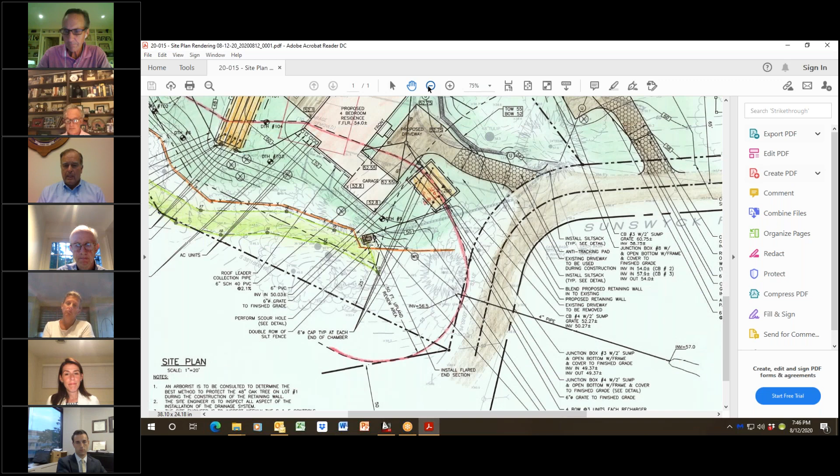Mr. Trinkus, would you like to speak? Yes, I would, thank you. My name is Stephen Trinkus. I'm a licensed professional engineer both in Connecticut and Massachusetts. I've been licensed as a PE since 1988 here in Connecticut, and in Massachusetts since 2017.

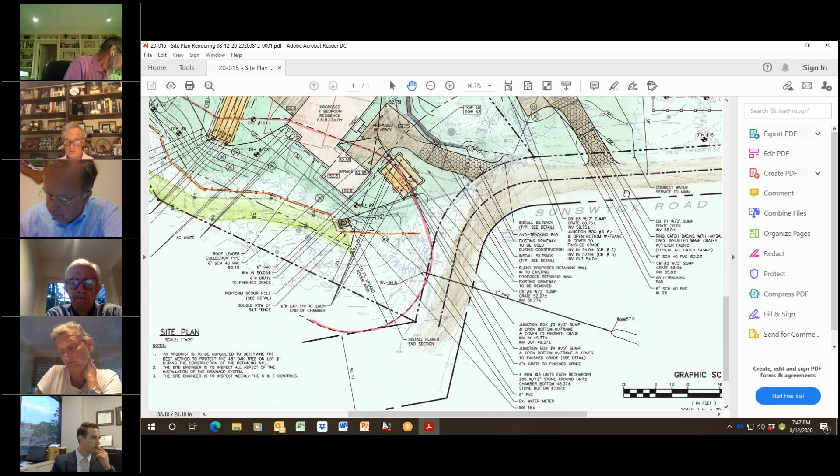To just go over, I think the primary concern is the septic system. Contrary to Matt Pollock, there's ample historical precedent with the State Department of Health using a hydraulic analysis to evaluate the effectiveness of a leaching system. Back in 1994, when the minimum leaching system spread calculation came out, that's when it was required by code. There was a provision that if you could not meet the minimum length, say you had a flat lot, which is generally where it was problematic, you could do a DEP analysis to show that hydraulically a shorter length than the required minimum would work. So there is precedent to use the DEP analysis for the groundwater mound, for the bacteria travel time, for nitrogen dilution, all the way back to 1994 in the code.

My concern with the septic system is not with regard to the septic per se, but the potential adverse impacts to the downgradient wetlands and watercourses. This nitrogen analysis and bacteria analysis has been used in other communities, New Hartford being one of them, for redevelopment of cottages along West Hill Pond, which is a very pristine water body in the northwest corner of the town.

People often come in to tear down a 400 square foot cottage and want to build a 4,000 square foot house on roughly half an acre or maybe a little larger. Many of the septic systems are downhill of the house, between the house and the lake, and the town has requested this analysis. In many cases, it has shown that the distance between the septic and the lake is inadequate to renovate the bacteria, and also that there's not enough drainage area to dilute the nitrogen to the 10 milligrams per liter drinking water standard.

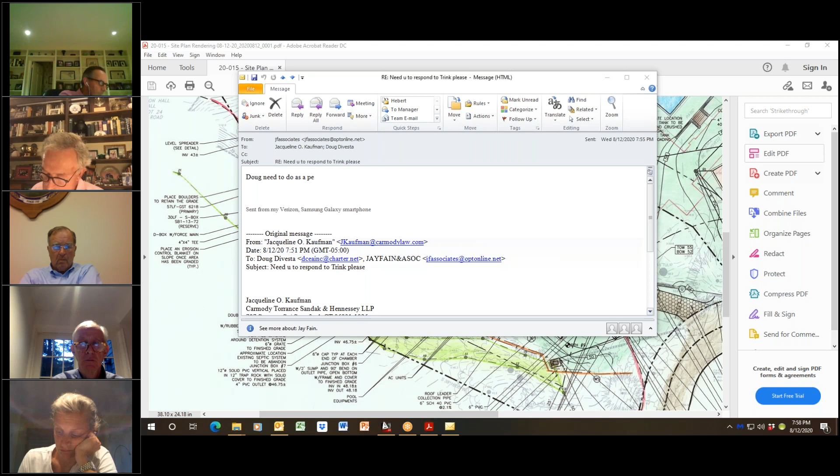Regarding feasible and prudent alternatives, this has been discussed for years, going back to my experience in land use in Redding, which was on the forefront of upland review areas back in the early 1980s. A no-build alternative is a feasible and prudent alternative under the law. So with an existing single family house on a large parcel, leaving it as such is an appropriate thing to do—that's an alternative here. Smaller houses with less intense development is also an option. This is an awful lot. The site, as I stated in my initial letter, is really pretty marginal for this scale of development. The fact that you've got to cram everything in—and I don't use that term lightly—the septic systems require a substantial amount of fill because you don't have 4 feet to ledge, you have more than 2 feet, which is the code requirement, and the gallery systems—everything's shoehorned in here.

Smaller houses, where everything is pulled farther from the wetlands, is also another viable alternative. But it remains my professional opinion that the septic system on lot 1 will discharge pollutants—bacteria and viruses—over the wetland area, and these are not being adequately attenuated. Additionally, the nitrogen is not being attenuated at the wetland boundary. That is a concern. I'm not discussing the effectiveness of a particular septic system here, but we're looking at the environmental impact of the septic system on a wetland resource. Thank you.

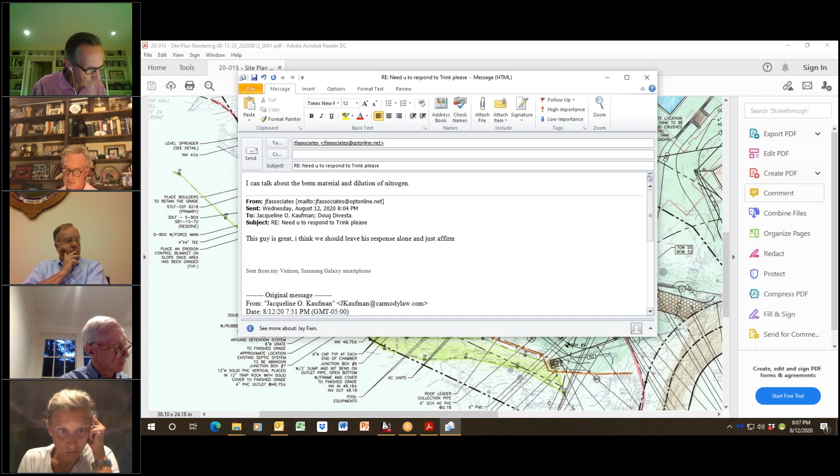The next one is the pretreatment of flow. Mr. Trinkaus had some concerns with pretreatment of runoff directed into the proposed Cultec systems. The reason why you want to pre-treat runoff is to try to capture as much debris as possible before it washes into the system, because if you have debris washing into the system, it could cause them to clog, and obviously that would reduce their effectiveness.

The Darien manual does allow a catch basin sump. Mr. Divesta has provided two in series to help make it easier for the homeowner to maintain, because the 4-foot depth would be too deep, so he has put them in series. I think that would go a long way. We want to encourage maintenance of these things, and the easier they are to maintain, the more likely they are to be maintained.

One of the things I also wanted to mention is there is a certain depth, it's 4 feet, so he's providing two in series. The other thing with the pretreatment is a lot of these stormwater management regulations are written thinking about larger commercial sites. I think there's a tendency for people to be more respectful of their own property versus a large commercial site. You're not going to have that same debris loading. So I'm comfortable with the arrangement Mr. Divesta is proposing. I think it's a good addition to the plans.

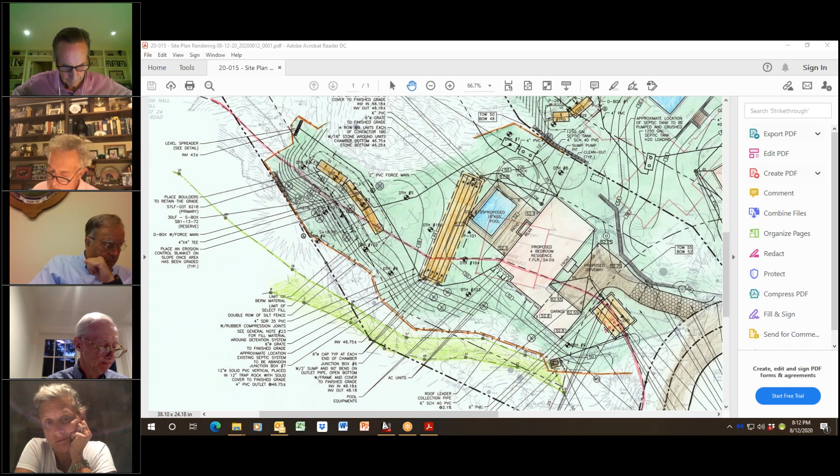It's actually not specified for other areas, but historically 12 inches has been what has been used in the past by the commission. Given that the manual is silent on areas outside of critical areas, I believe 12 inches is acceptable. I did have a comment about the location of the proposed pool.

That does conflict, but I think it's pretty easy. You can slide it in any direction, so that could just be a condition of approval. For the proposed pool, yes, as it is shown right now.

I agree it is too close to that proposed Cultec system, but I don't see anything preventing it from being moved to the northwest. So that could be, I believe, a condition of approval. By moving it, it's not really going to change the runoff patterns or the amount of impervious surface, so I think that could be moved.

Next is the sump pump and the footing drains, I had some comments. This is Eric - when you say 'move,' that can mean six inches to somebody and ten feet to somebody else. What are you thinking? I'm thinking you probably want that corner to be at least as far as the depth of that Cultec system - probably on the order of 6 to 8 feet.

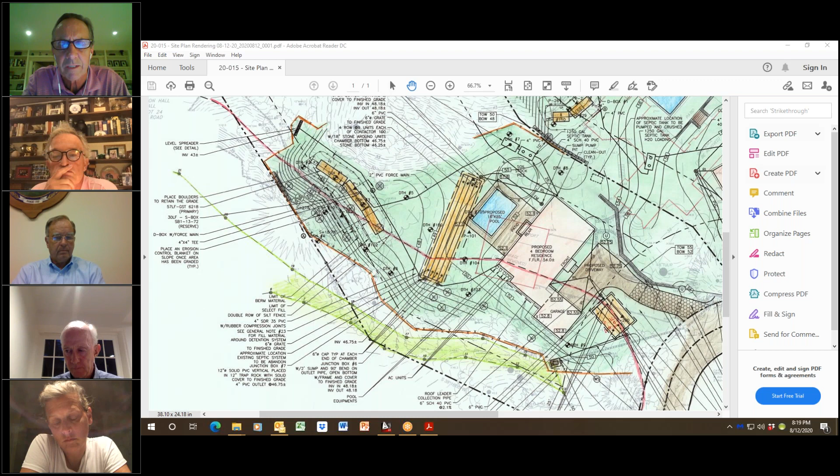Okay, you do it every 6 months. There's got to be maintenance of this system to ensure it functions into the long term. I come from a background with extensive commercial property management, maintenance, and overview of enormous systems with very detailed maintenance on every piece of equipment, pump, anything you can think of. But I don't remember seeing anything of that detail for a homeowner. How do we protect the environment here if this application's approved, with the proper and necessary maintenance, and who keeps the calendar? How is it enforced?

That's my question, sorry to be so long-winded. I understand, we don't have a calendar per se. We do put the drainage maintenance on the land records, that it's required of future owners, so they're aware.

So in terms of the answer, are future owners aware of it? And the answer is they are obligated to be. As far as we don't have a calendar per se, but in terms of the maintenance, we would be able to require somebody to show that they've been maintaining. I think this may be probably the most detailed drainage maintenance program we've seen on this project.

It is possible we could require them to have maintenance records that they would need to produce. I thought that was a good suggestion myself. I heard it earlier, Rich, as you point out, without burdening you, your staff, or the commission. I think we could do that now. We could specifically start making that a condition. I hadn't heard that specifically from other towns. I thought that it sounded good to me.

I have no idea how Eric or the rest of the commissioners feel, but to be honest, if we didn't have these systems, there would be no development in town. So this project isn't unique in that it would have a maintenance plan. We do have them on other projects. They are in the land records.

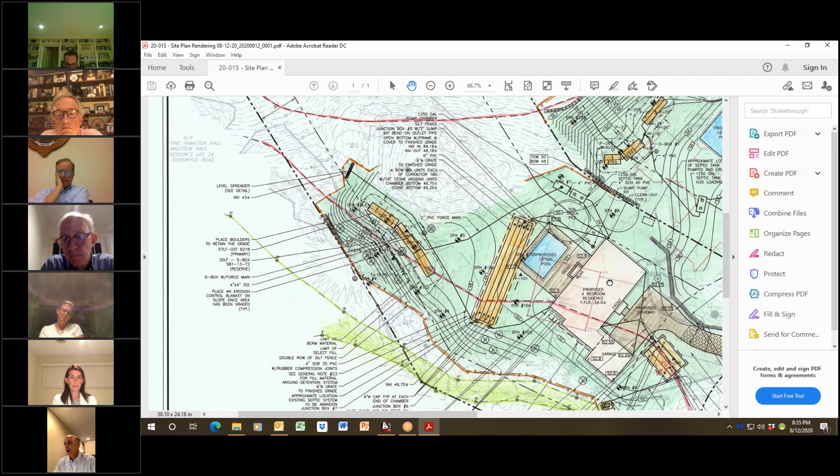If you remember from the first meeting we had, the house and garage were back in this area. We came around it, which pushed the house further into the upland review area - that was based on one of the commissioner's comments. Therefore we changed the house around and moved it to a different footprint. Most similar houses have a garage on the end, but we made an L-shaped house with a front courtyard and side-load garage. Right now with the house we're proposing, we are at the setback lines on the garage corner and the house corner, so the house really cannot be moved anymore.

My client would really want to see a 5-bedroom house, and I told him no, we can't, because of the size of the septic system - it's as big as you can get. This is about the smallest house we can put out there relative to the building setback lines for planning and zoning.

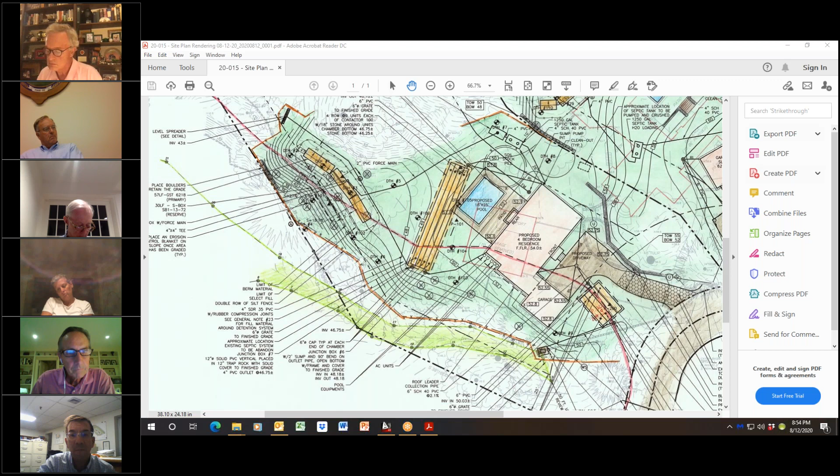We won't have to rely on perk tests done when we haven't had rain in so long, because perk tests in a drought time are going to be different than perk tests done in a very wet time. I'm not an engineer or a soil expert, but it's obvious that perk tests during a drought are not the same as perk tests during a wet time.

And we can't rely on some heretofore non-existing tickler system that we think is going to work. There are a myriad of reasons why this proposal is not satisfactory, and I hope the commission just turns it down and doesn't continue this discussion. Thank you for your time.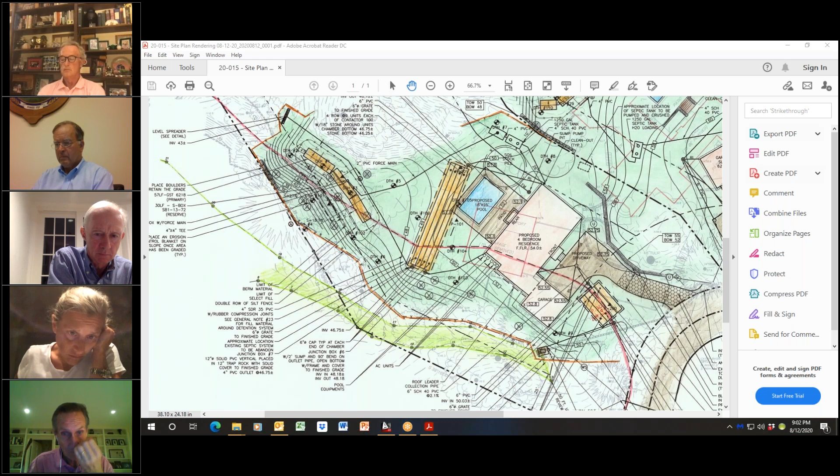And then lastly, when we put in our septic system, we were told that whenever you want to put in a new septic system, you have to identify where there would be a reserve. I know there's a reserve location on lot 2, but I can't see the location for the reserve on lot 1. Again, I'm not a professional, so it's hard for me to see through it all. But that would be a question I have as well. Thank you so much for your time.

Thank you, Mr. Delp. Doug, would you like to answer?

Eric, I'll answer. The setback for a septic system to a property line is 10 feet for a septic tank. A leaching field, if it's in grade, is also 10 feet; if their septic system is out of grade, meaning above grade with fill, it's 15 feet. So I'm not sure who told him 50 feet to a property line. As for 50 feet to wetlands, there are no setbacks from wetlands except what's required by the EPC or Wetlands Commission, depending what town you're in. There is a setback of 50 feet to a water course, which can be reduced to 25 feet if the lot was created prior to 1982. So those are the two issues there.

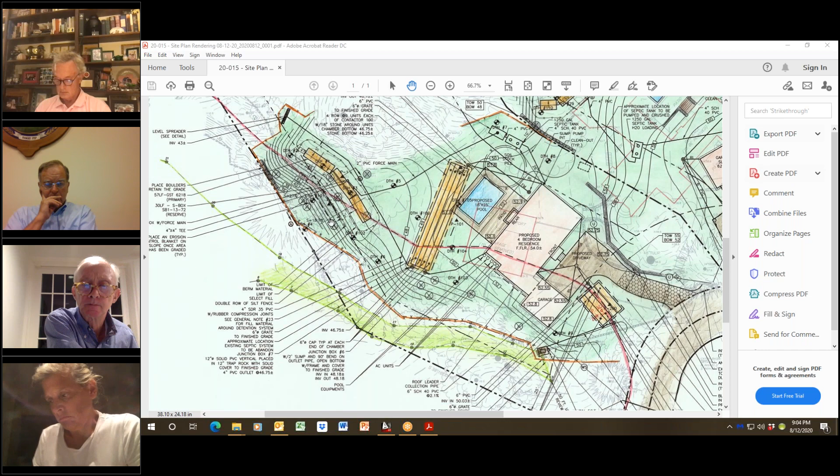Septic tank location, yes, the tanks can be moved around. We'll find a spot for them. Again, it's a pump system, so the tanks can be moved around; we can find a location for them if need be. The reserve area for lot 1 is just below the primary area, which I'll highlight here. Where the cursor is, right there is the reserve area for lot 1, and the reserve area for lot 2 is on the north and east side of lot 2. I think that answers his questions.

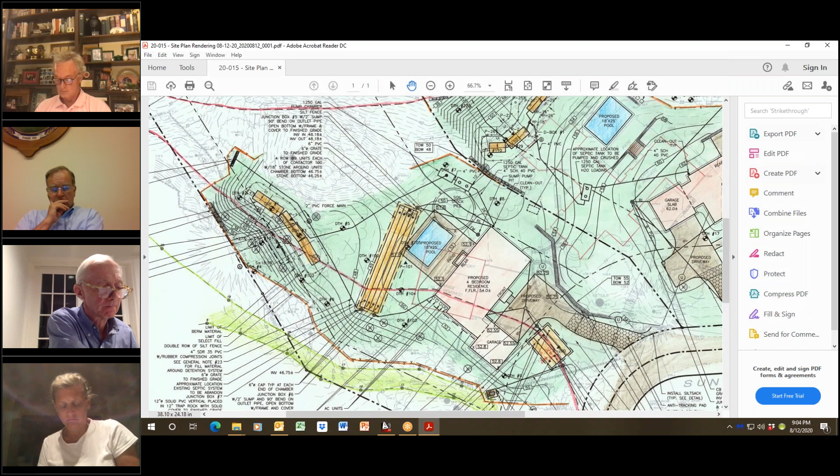Thank you, Doug. Mr. Delp, are you satisfied with Mr. Nevesta's answers? Well, again, please forgive my ignorance, but the reserve area for lot 1, doesn't that put it further towards the wetlands and further into the upland review area?

Yes, it's closer to the wetlands and the upland review area, but it's a reserve area. That is only there if it needs to be used in the future. Typically, once you get a lot, the reserve area is required for subdivision approval. So once a house is constructed and gets a CO, the septic system is in, they get the CO.

The reserve area goes away once that happens. The reason they did this is because they've had problems in the past — if the primary system gets mucked up during construction, or if it's closer to a house and a vehicle drives over and destroys the area, they have a reserve area to put the septic system in. But again, once the house gets a CO, the reserve area goes away. You've got a primary area to work with.

In the future, years down the road, possibly decades down the road, if the system does fail, you can put the septic system back in the same location. You don't need to find a new area, so that can be done as well. Again, the reserve area is closer, but it's not something that's going to be used. The primary system is going to be used, but the reserve area is there in the event it needs to be used, potentially if something happens to the primary area.

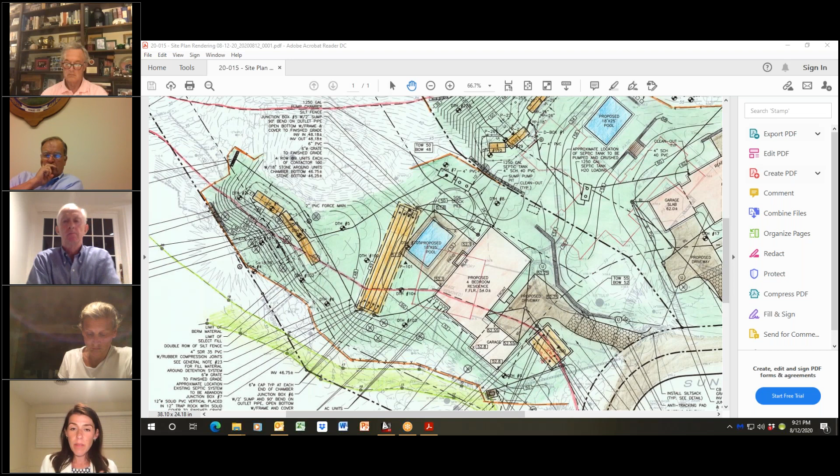I'm trying to think if I haven't responded to other things. I know we spent quite a bit of time coming back to the nitrogen issue—we put in a lot of detail for you that this will not be an issue. The state agrees it will not be an issue. Your expert agrees it will not be an issue. And you have, unfortunately, the hardest job here, which is to decide which direction this goes and what you want to reasonably rely on. But I can tell you and close here tonight with certainty that the applicant has delivered you the information you need to be able to make a positive decision.

Thank you, Attorney Kaufman. Is there any other member of the public that would like to speak?

That's Dr. Hamilton Hall. I'm getting texted from all my neighbors, and they want me to point out that, Ms. Kaufman, I think you gave a wonderful presentation, but you cannot say there is no risk because you do not know that. These are theories. You don't know what will happen with degrading of the wetlands just because you're relying on precedents and regulations. That doesn't guarantee there's no risk. You might be mitigating the risk, but you are not eliminating it. There's a difference between no risk and mitigating the risk.

There are a lot of things here that can degrade the wetlands, and obviously blasting, though that's not an issue today, is another one of those things that will add to it further. So I'm imploring the commission to please take the prudent and feasible alternative of denying this application for subdivision and building of these two large homes, and suggest that they either not build or build smaller. Thank you.

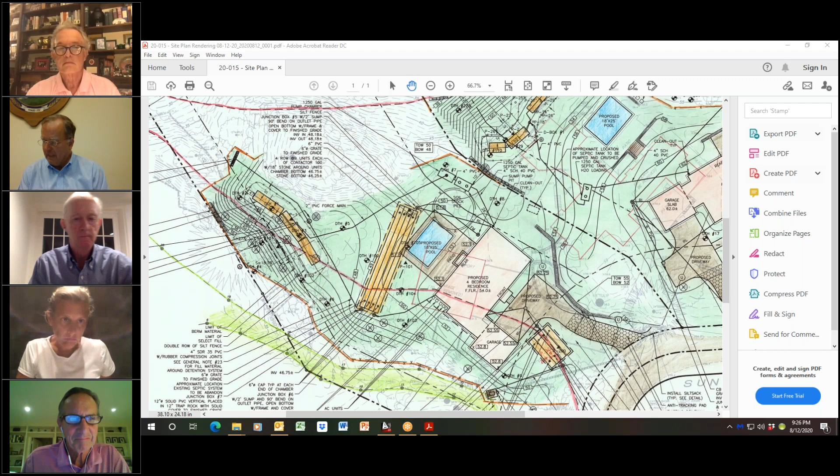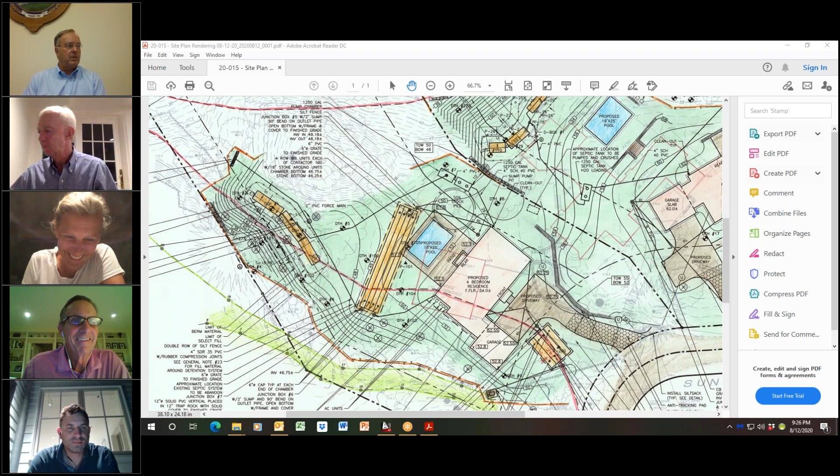I'm going to guess Jim has all of mine, but I'll just go down quickly. Send it to me. Can you still send them to me? Okay, then never mind. Just see if you could still send them to me. We won't post them until, you know, yeah. Okay, they're all just grammar type things.